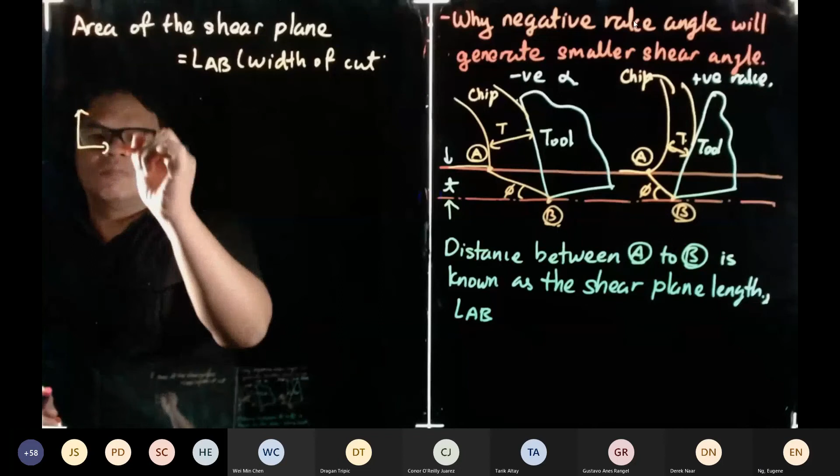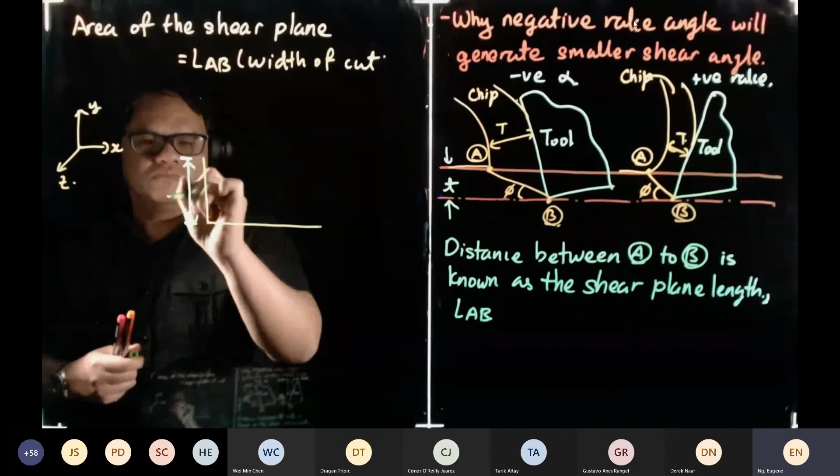X, Y, and this is my Z. So this is my... over here, this is my T, right? Then we have a length over here. This is our point A, this is our point B. Then we have a Z component.

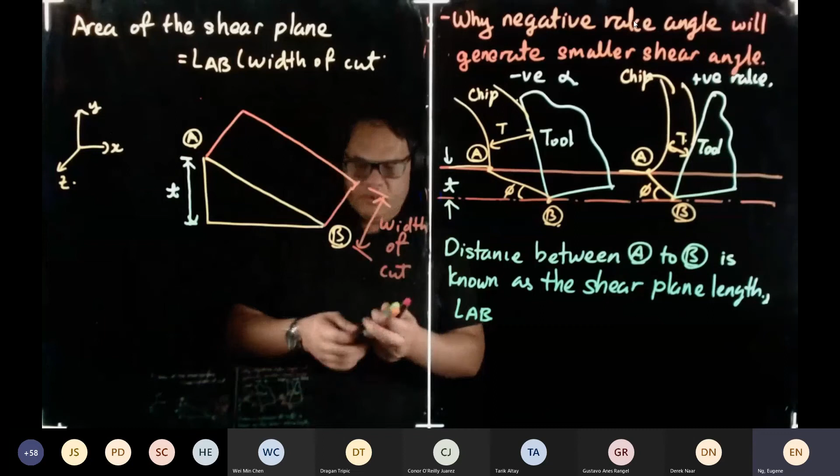So the distance between here to here, this is my width of cut, or depth of cut, either one. So the area of the shear plane is this area over here.

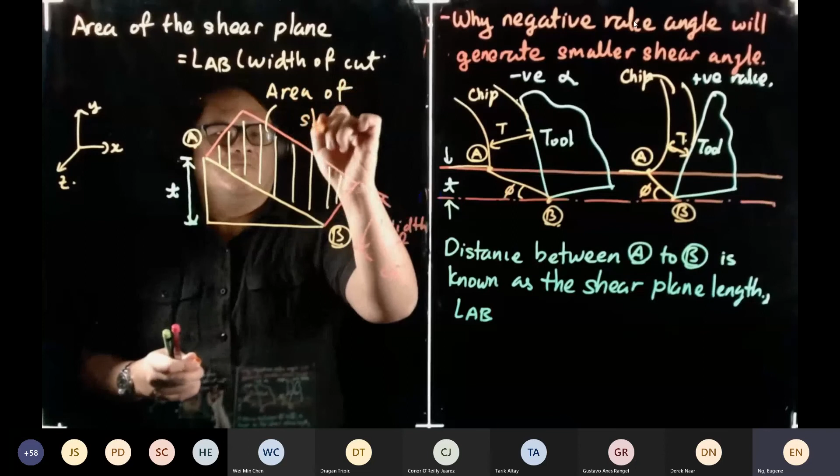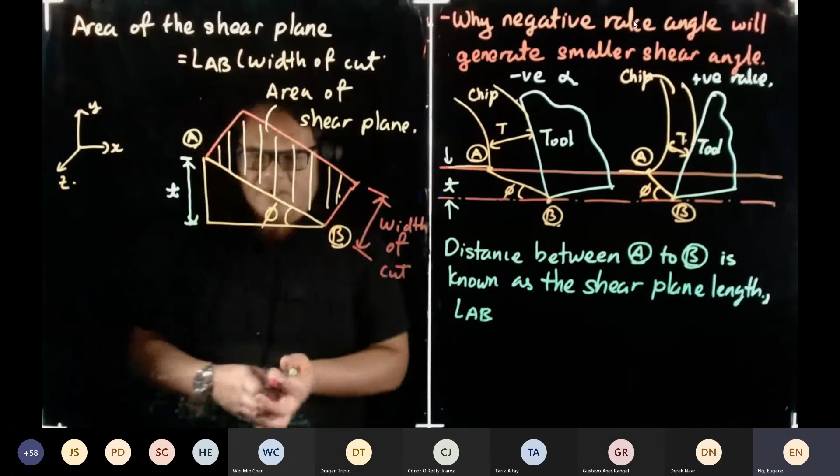So this is area of shear plane, and the shear plane is controlled by the shear angle. So LAB, we know mathematically it's straightforward. LAB is equal to T over sine phi. So area is equal to LA or T, W over sine phi, and the width of cut is W.

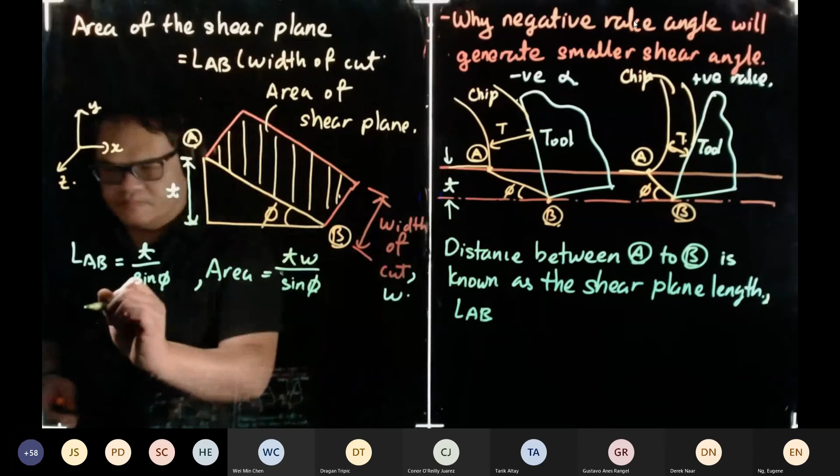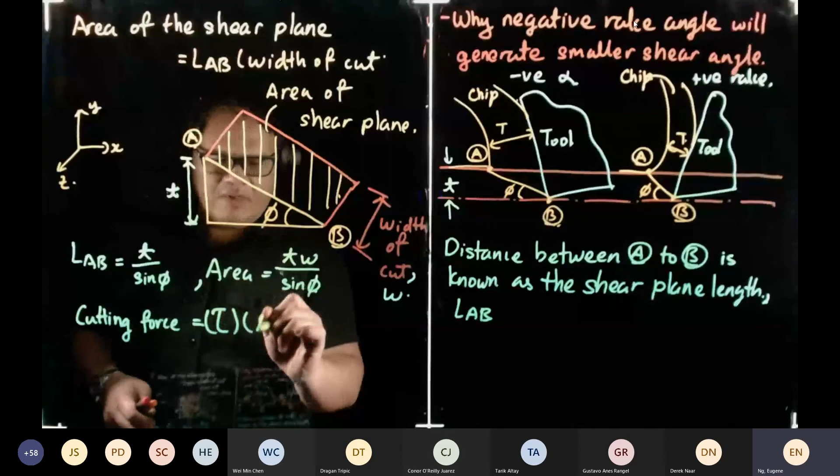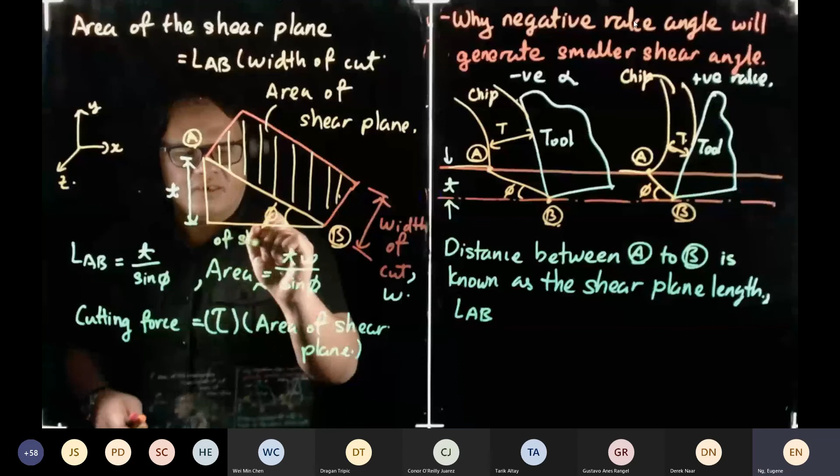So we're going to come up with a very simplified calculation for cutting force. Very simplified. So the cutting force is equal to the shear stress multiplied by the area of shear plane. So when we put this in, we get Tau multiplied by T W over sine phi.

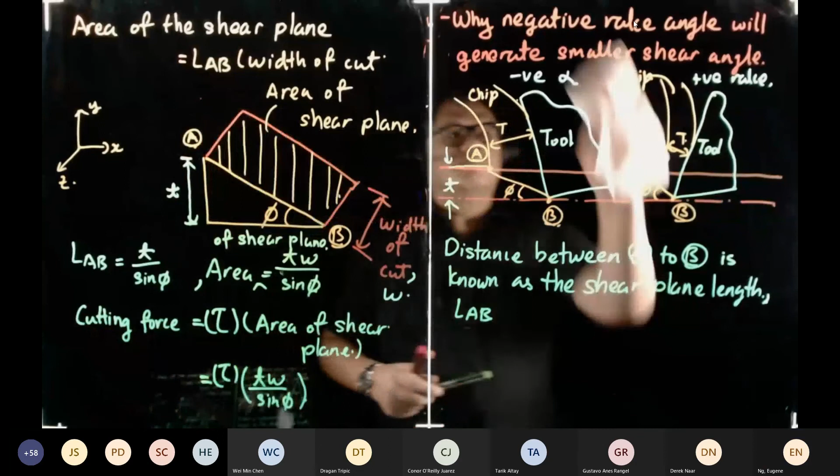So we're going to make an assumption. Do that with your ice cream, okay? Positive rake and negative rake and see what happens, okay? Or with your butter when it's a pancake day and see what happens.

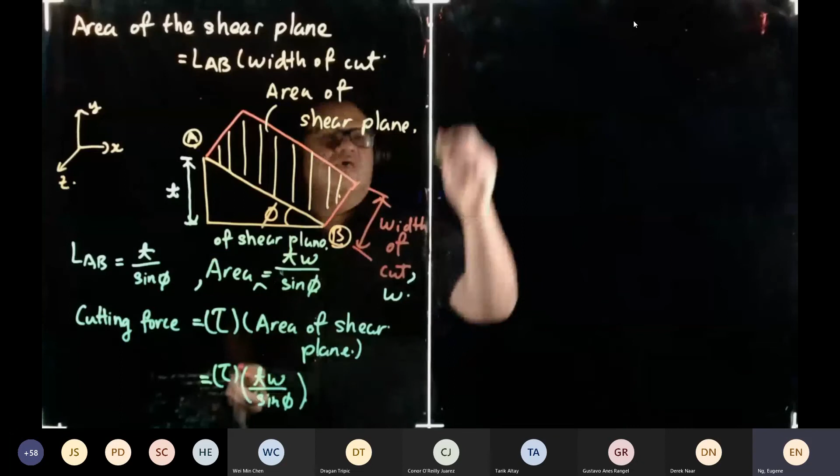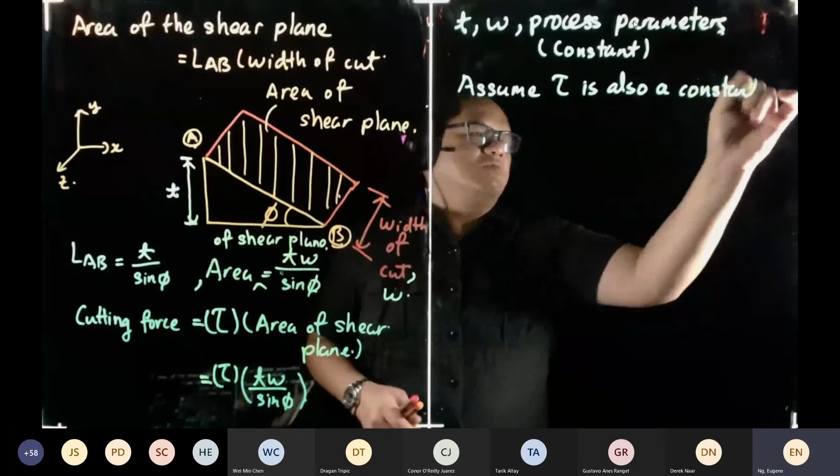Then we know that t and w are known as process parameters. So process parameters means you set it up and it's constant. And then we're going to assume that shear stress is also a constant. But it will change, depending on the material. So we've got to assume that it's going to be constant, not going to change significantly.

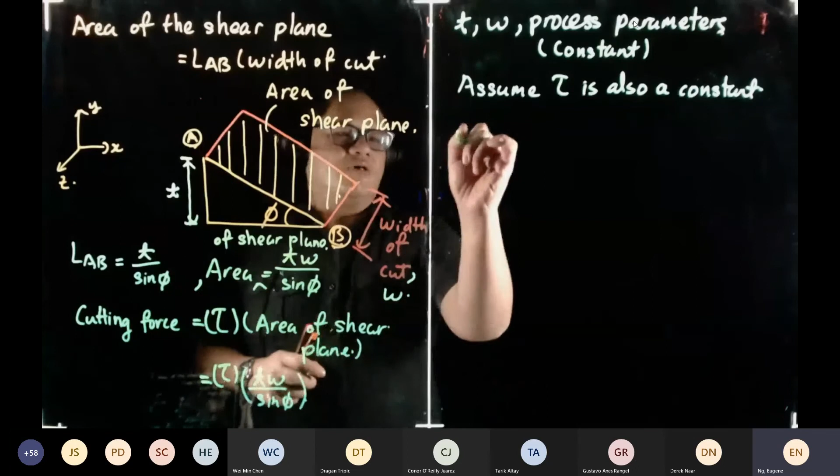So we're going to draw a table now. This is alpha, rake angle for positive, and that is rake angle for negative. So we make some assumption that the shear stress over here is our constant. And from our figure, as we've seen before, the length of AB for positive rake will be lower, for negative rake will be higher.

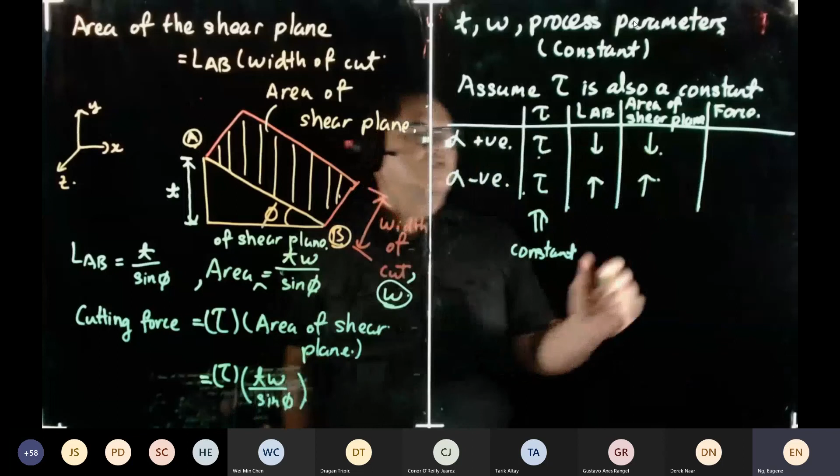So if you look at area of shear plane, when the length is lower, the area of the shear plane will be lower because W over here is a constant, the width of cut or depth of cut that you decide to use, and this will increase. So that is why if you look at forces, force is equal to shear stress times the shear plane. So for this case, if you compare both, the shear force will be lower for positive rake and higher for negative rake.

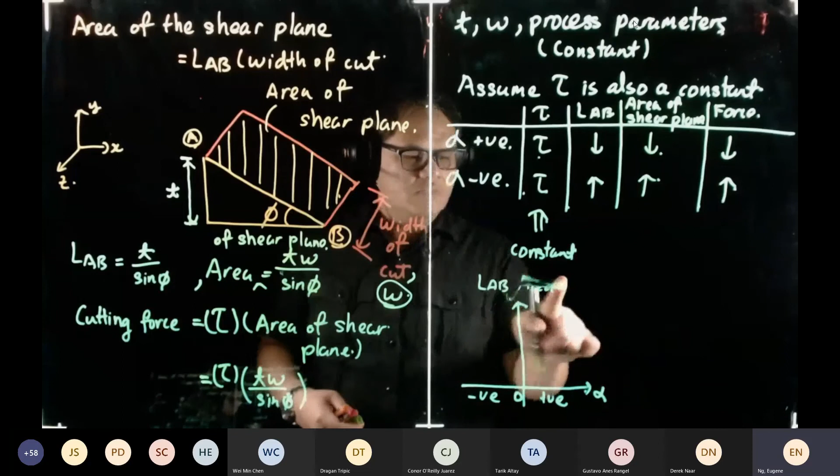So we can draw another trend from here. If this is our alpha, this is 0, this is negative rake, this is positive rake. So we can draw for LAB, the length of the shear plane, or the area - both will have the same trend. So negative rake will be higher than positive. This trend over here is very similar to your forces.

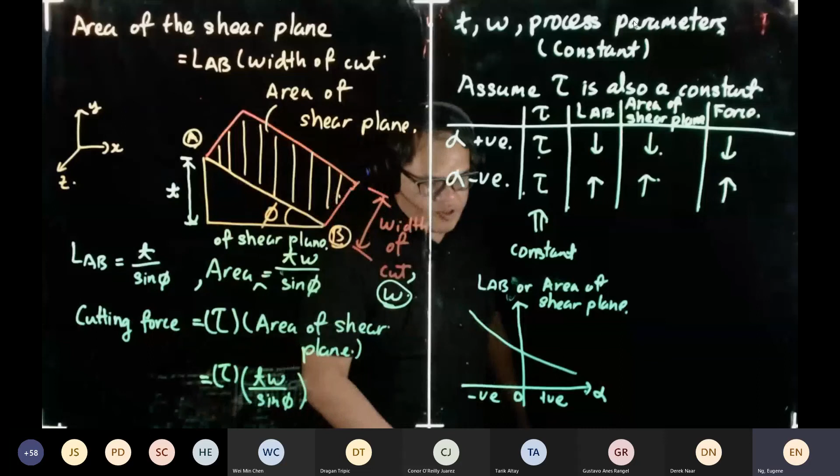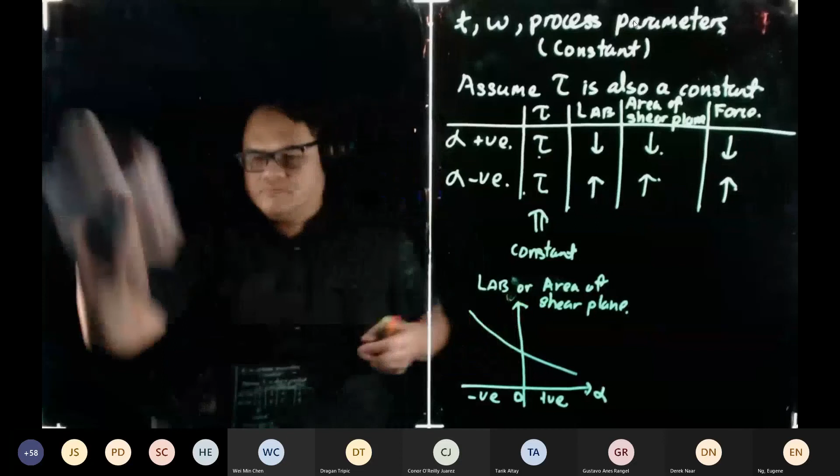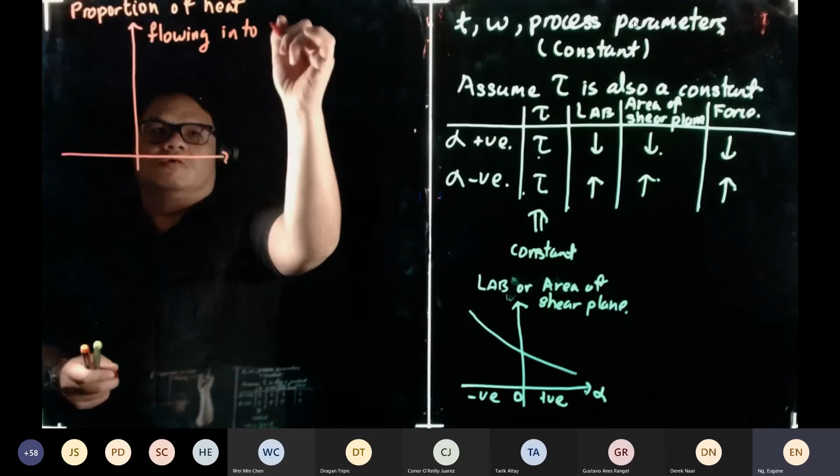Then I'm going to draw one more trend that is acquired experimentally. This one is again acquired experimentally. So it's going to be the proportion of heat flowing into the workpiece. So alpha, this is positive, this is negative, this is 0.

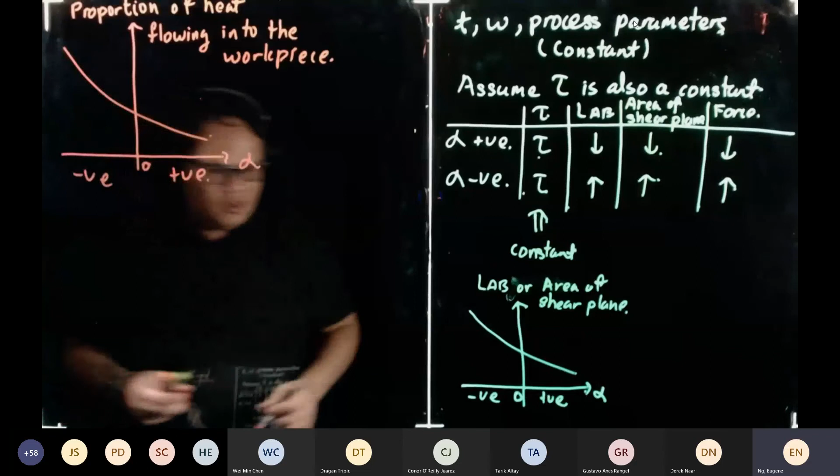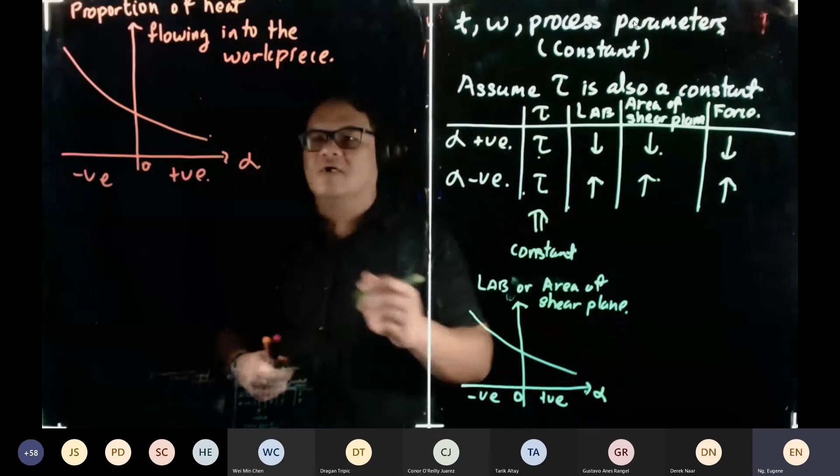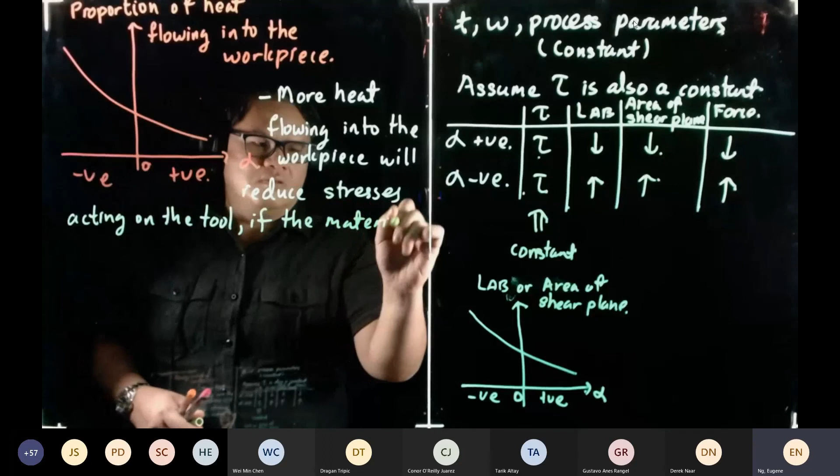So when you use negative rake angle, more heat will flow into the workpiece. So like what we mentioned earlier, if negative, more heat going to the workpiece will reduce stresses acting on the tool if the material is sensitive to thermal softening.

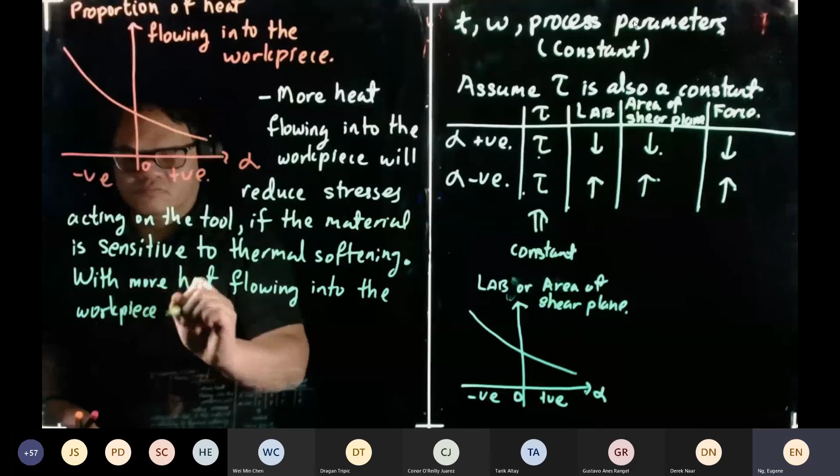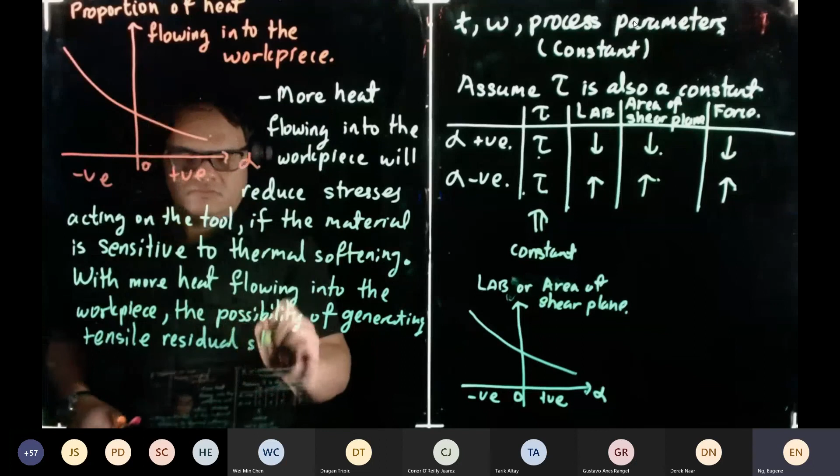With more heat flowing into the workpiece, the possibility of generating tensile residual stresses increases. So plus and minus.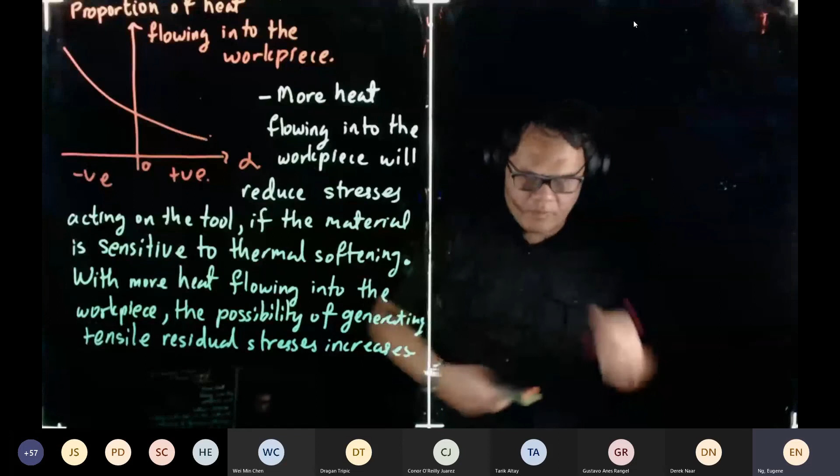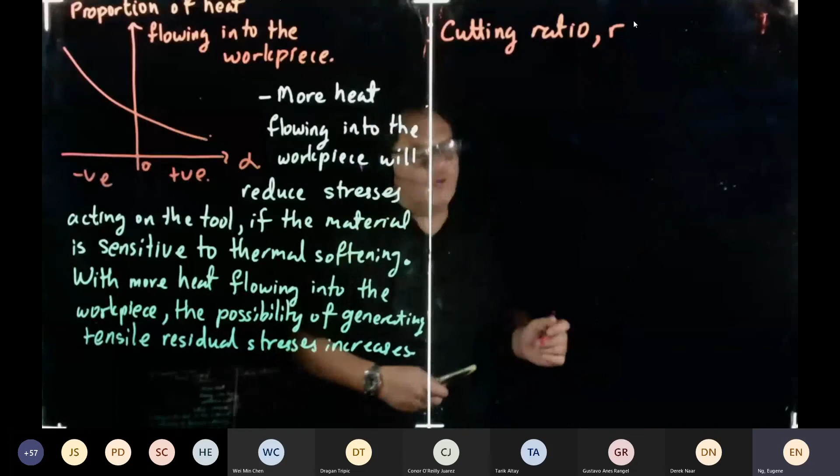Then another trend, the last trend that we're going to draw. So the one more that I'm going to draw is the cutting ratio. So cutting ratio is small r, equal to small t divided by big T, where small t is the undeformed chip thickness.

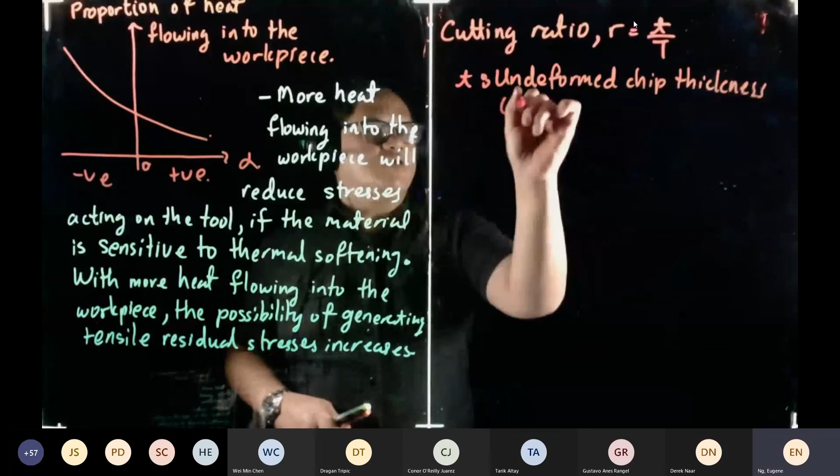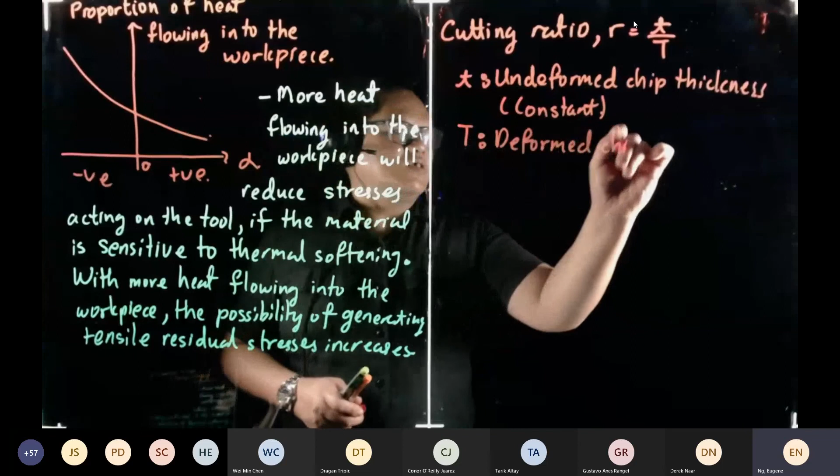And small t is a constant, a process parameter that you define, okay? Then big T is the deformed chip thickness. The deformed chip thickness is changing, and it's always a fact that small t is less than big T, so r will always be less than 1.

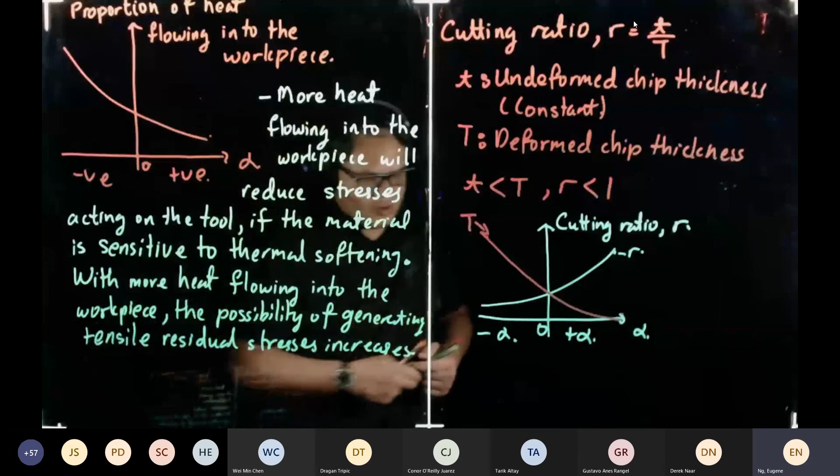So if we were to draw a trend for this - this is our cutting ratio, alpha, 0, negative, positive. The deformed chip thickness for negative rake will increase, will be higher. So the trend we get is this way, because if we look at our big T trend, the deformed chip thickness trend will go like this. Negative rake angle will have bigger deformed chip thickness.